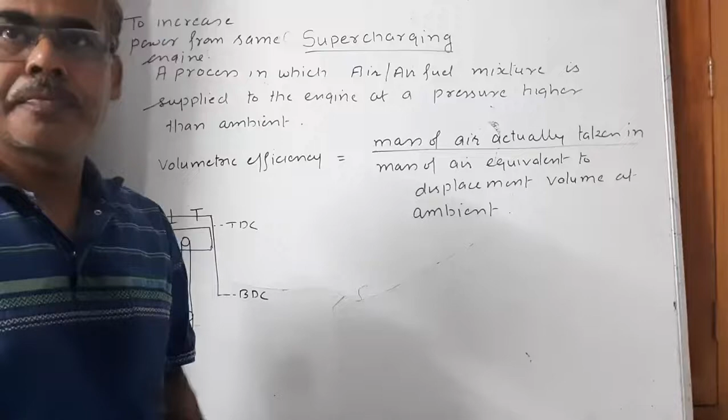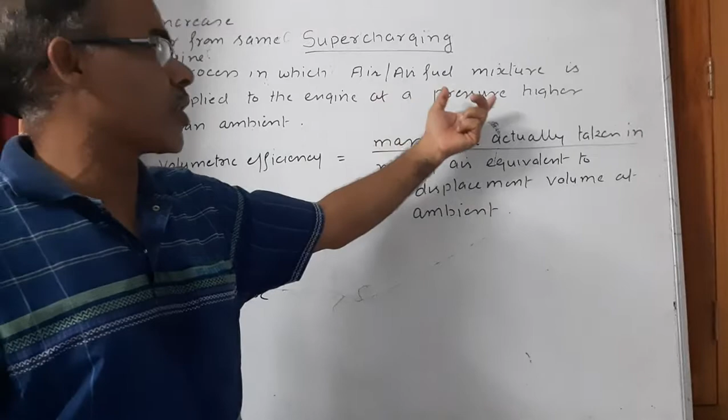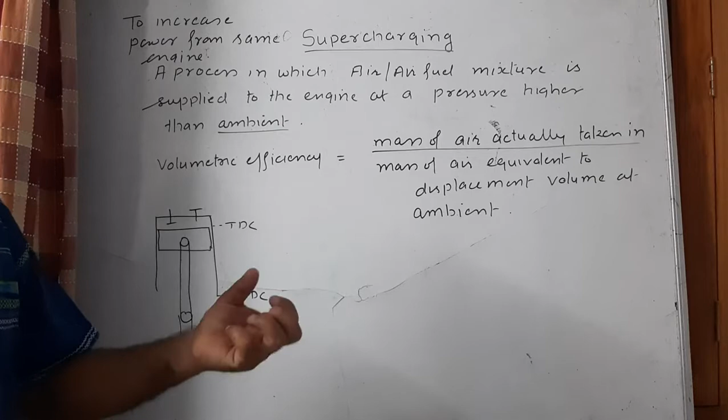So today's topic is supercharging. What is supercharging? Supercharging is a process in which air or the air fuel mixture is supplied to the engine at a pressure higher than ambient.

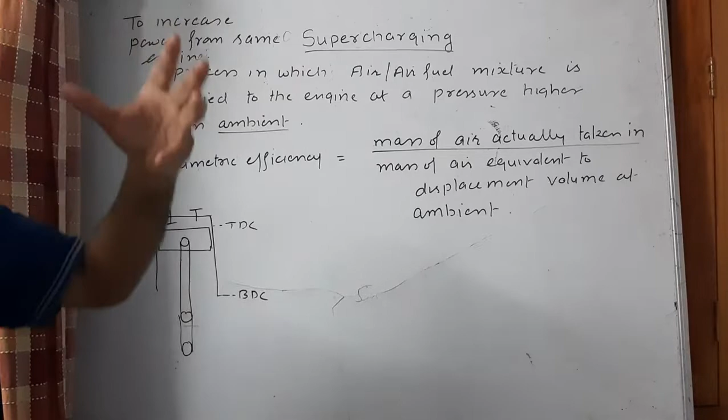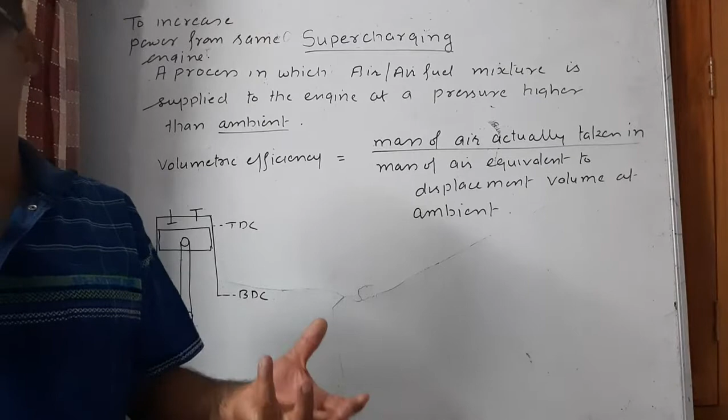What is the motive of supercharging an engine? The motive is to increase power from the same engine. If we can supply more air fuel mixture to the cylinder for the same volume, more energy can be supplied to it, and if the conversion efficiency is same, the power will increase.

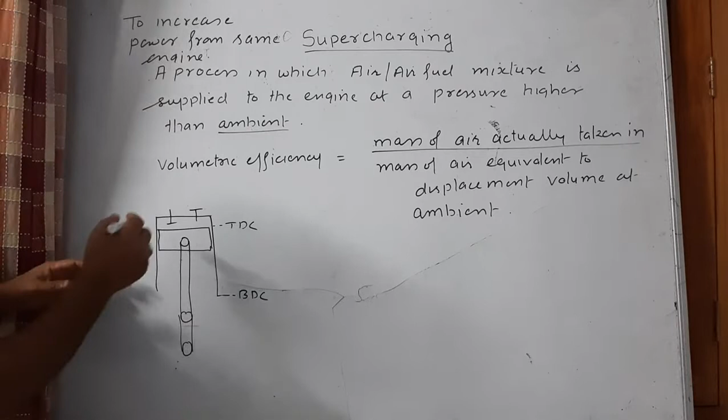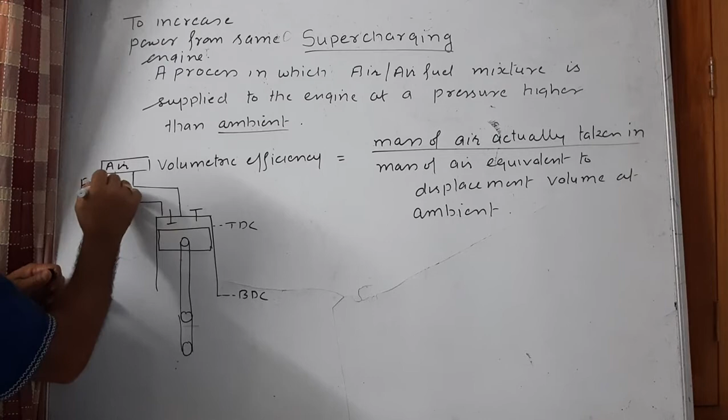Now what happens? I have drawn an engine. During the suction stroke, this is the inlet valve, this is the exhaust valve. On the inlet valve there is this air filter.

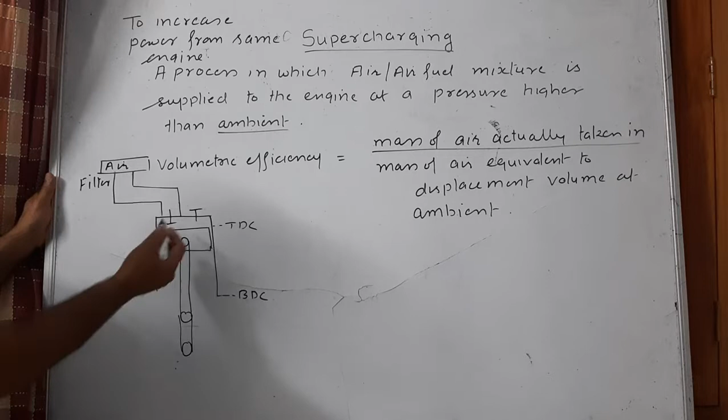When the suction stroke starts, atmospheric air enters the engine because of the pressure difference created due to increase in volume. When the piston moves down, the volume increases and hence the pressure decreases. So the air from atmosphere flows through the air filter, if it is a petrol engine, then carburetor, through the inlet valve, intake manifold, and then comes to the engine cylinder.

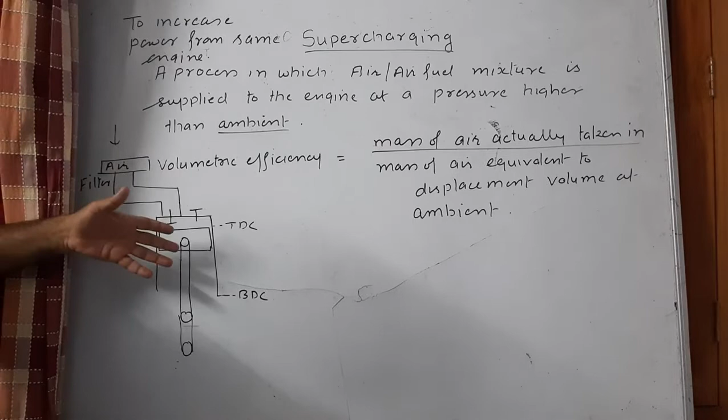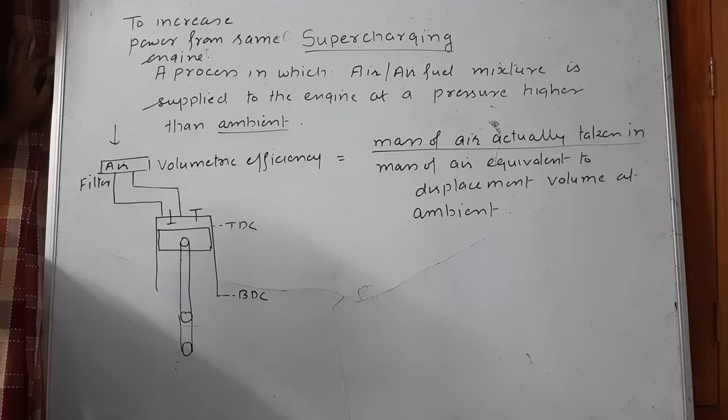So there are so many resistances, and there is a difference of pressure existing between the atmospheric pressure and engine pressure for the air to flow from atmosphere. Ideally, if we assume that as soon as the piston starts the downward stroke the air starts coming in, still the maximum quantity of air which can be inhaled by an engine is equal to the displacement volume, that is when the piston moves from top dead center to bottom dead center.

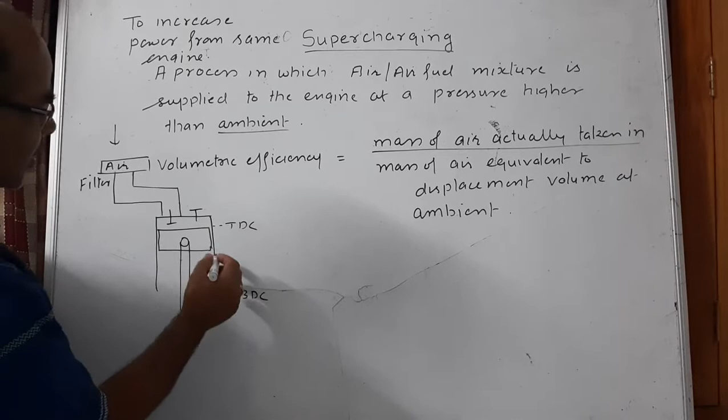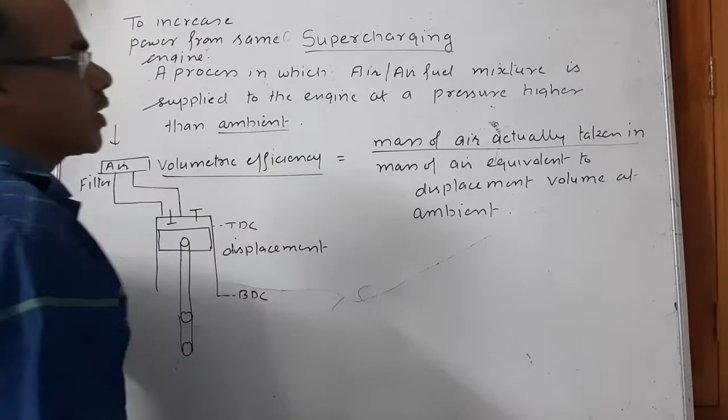So this volume is displacement volume. The quantity of air fuel mixture taken in determines the power output of the engine. This is how volumetric efficiency is defined: mass of air actually taken in divided by mass of air equivalent to the displacement volume at ambient, meaning atmospheric conditions.

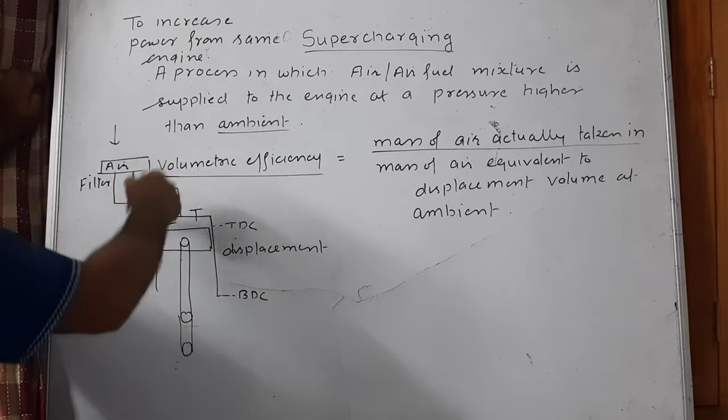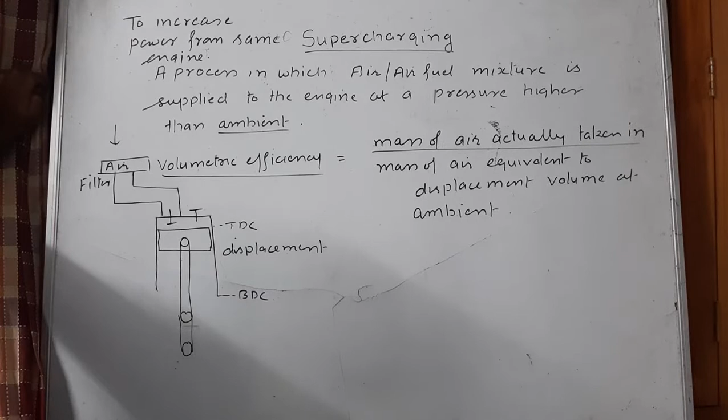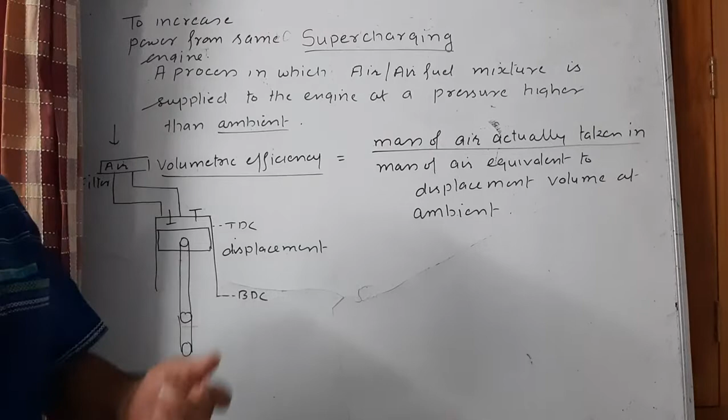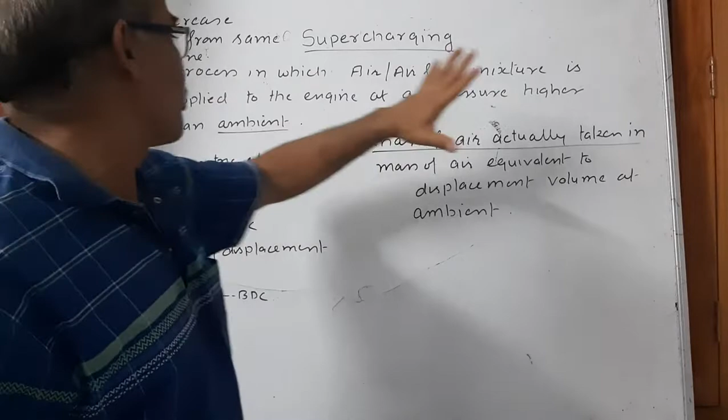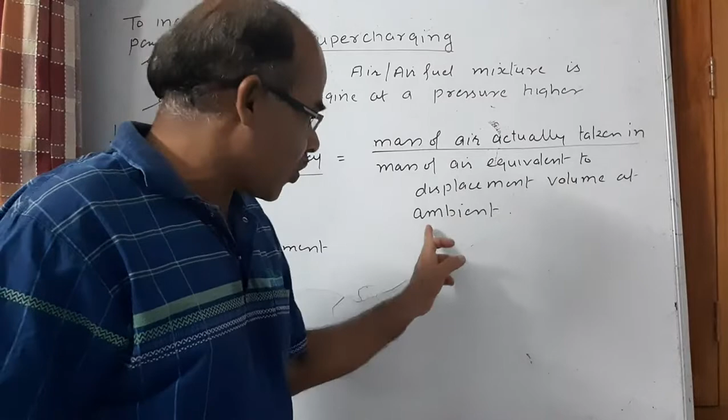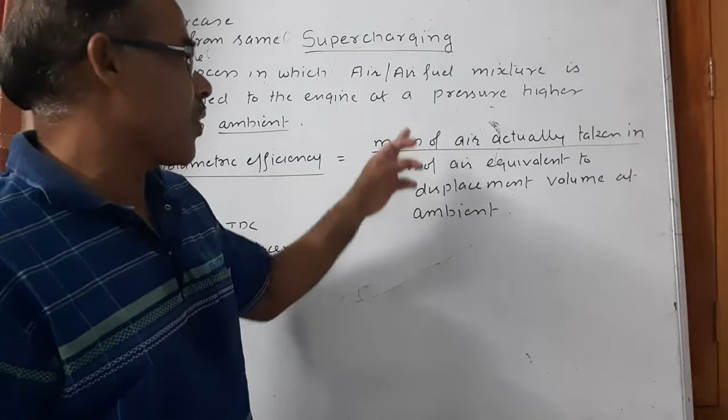So again, let me define: it is a process in which air fuel mixture is supplied to the engine at a pressure higher than ambient. In the definition, mass of air equivalent to displacement volume at ambient - if the intake air density is more than ambient, then this mass of air equivalent to displacement volume will be much greater, and the mass of air actually taken in will be much greater than the displacement volume when air is taken from ambient pressure.

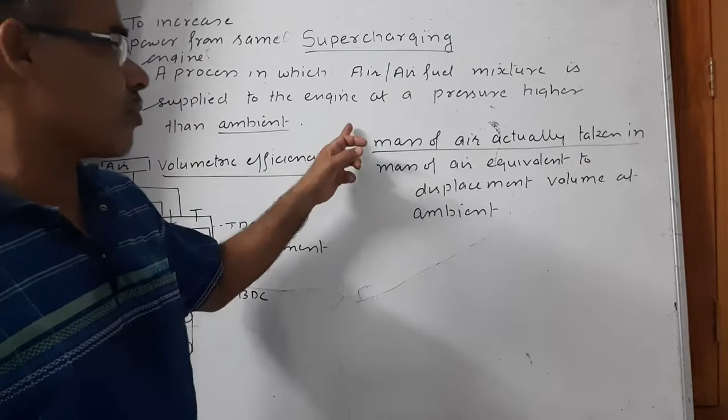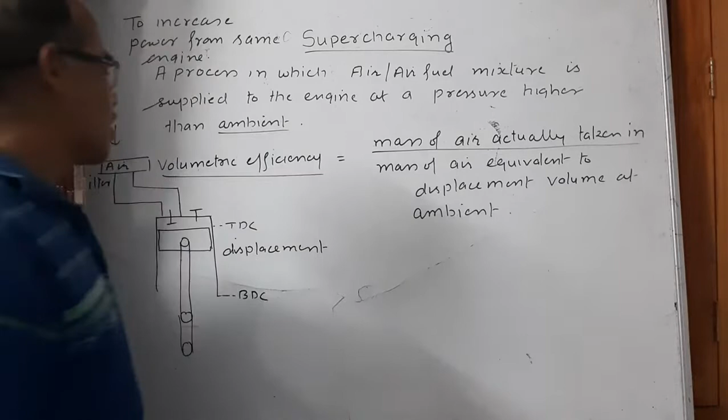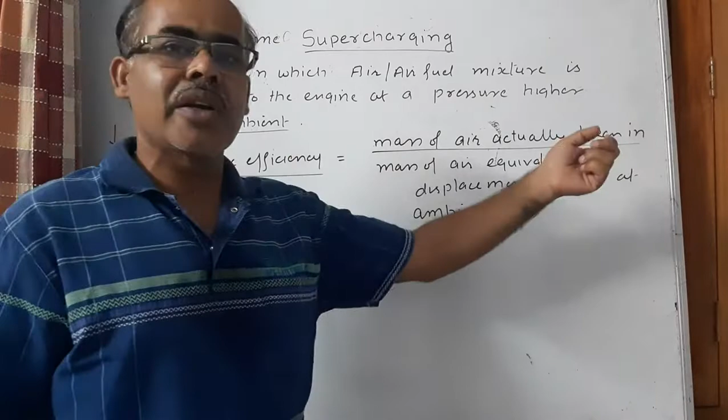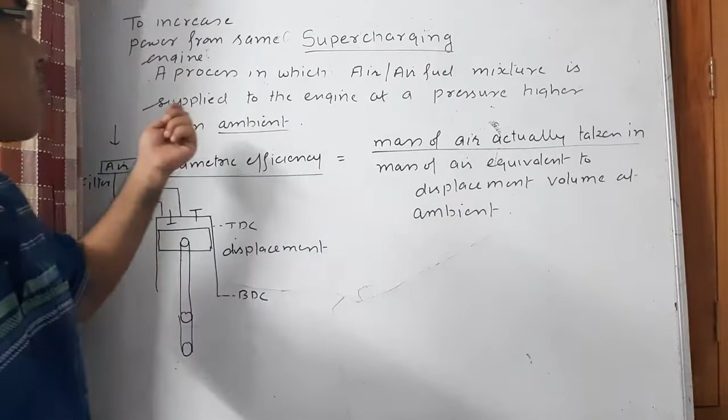If the mass of air actually taken in is at higher pressure, then this will be much more than the displacement volume, and hence for a supercharged engine the term volumetric efficiency is redundant. That is, volumetric efficiency cannot be defined because this ratio will be greater than 1 - mass of air actually taken in will be much greater than the mass of air equivalent to displacement volume at ambient. Hence volumetric efficiency is redundant for a supercharged engine; it is valid only for a naturally aspirated engine.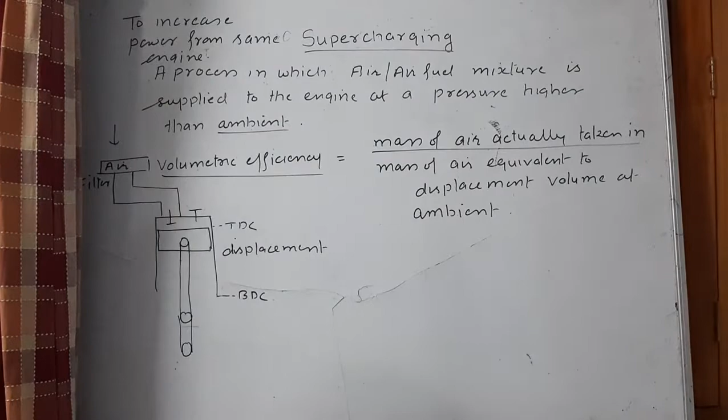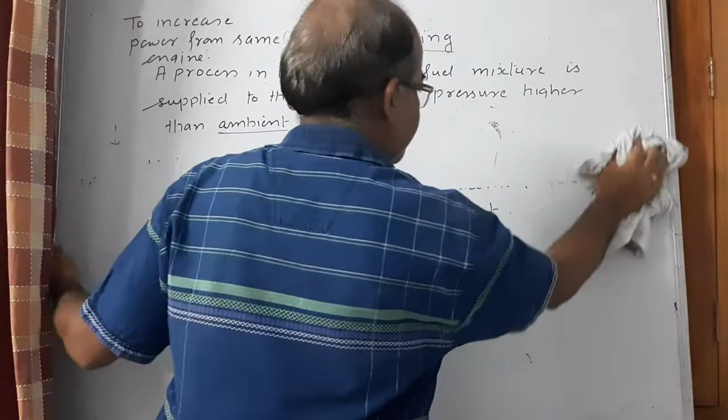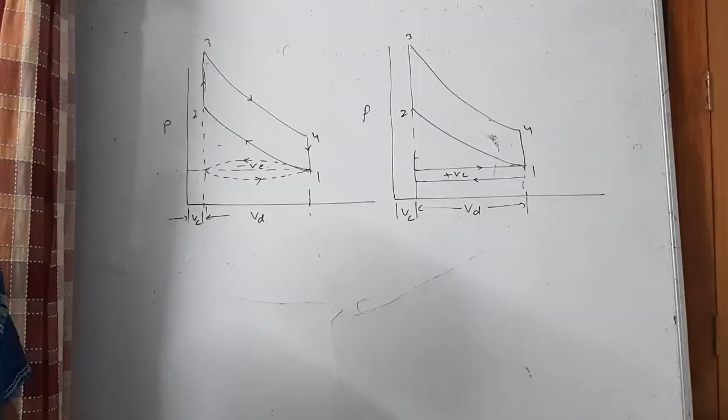So let us see how the PV diagram helps us understand the whole concept. Let us consider these two PV diagrams: this one is for a naturally aspirated engine, and this is for a supercharged engine.

Here, this loop is negative - this is for the exhaust stroke when exhaust gases are expelled from the engine cylinder, and this is during intake. The pressure during intake is lower than atmospheric or ambient pressure, so that air rushes in. So this loop is negative because work is required to force the exhaust gases out; this is the exhaust stroke, this is the mechanical cycle.

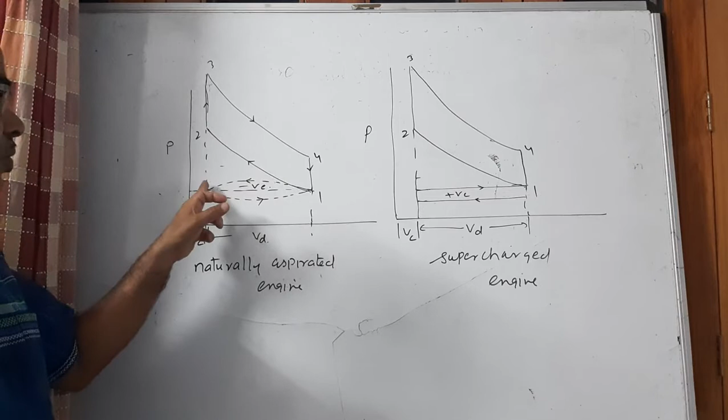So the work required to force the exhaust gases out - this curve is above the curve where the air fuel mixture is coming in due to pressure difference.

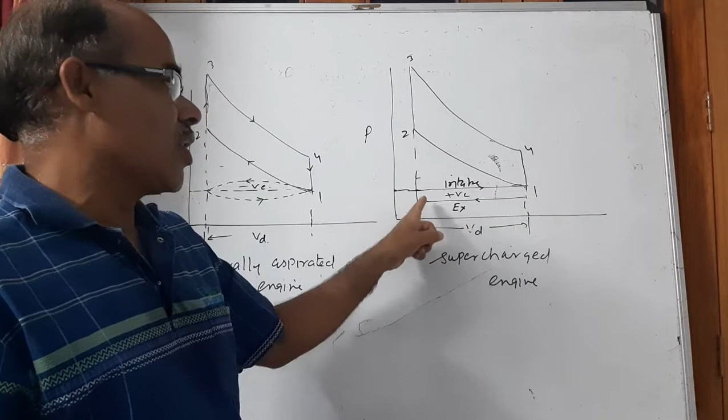But here, if you see, the air fuel mixture is supplied at a pressure. This is the exhaust pressure and this is the intake pressure. Here the intake pressure is higher than the exhaust pressure, so this loop is positive and hence it adds to the net work of the cycle.

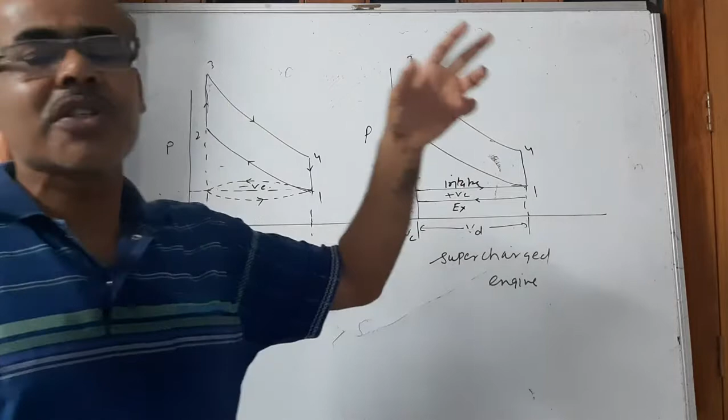Of course, some work is required to compress the air or air fuel mixture, and that would definitely be greater than before, but the difference will be less and will be compensated by the quantity of more fuel which can be added to the engine, and hence more power can be obtained.

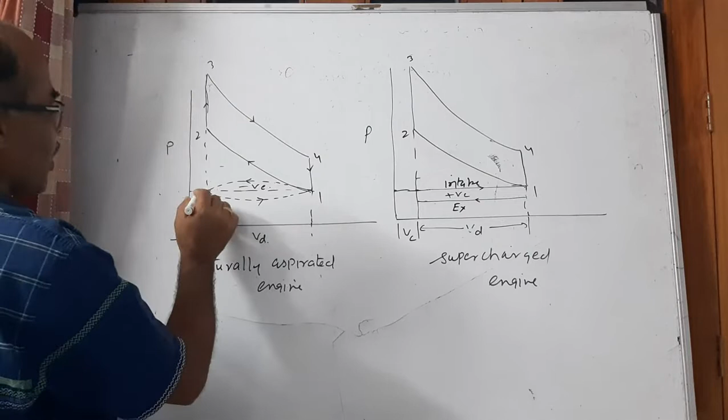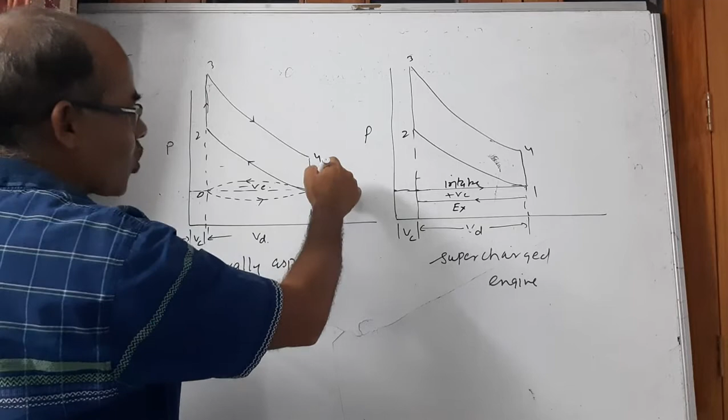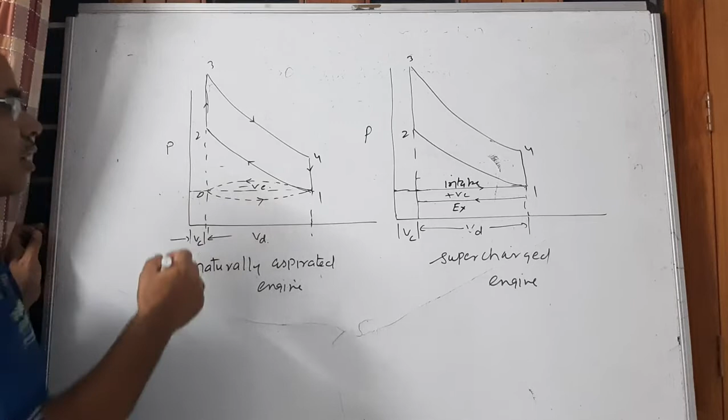So you just see points 1, 2, 3, 4: from 0 to 1 is the suction stroke where pressure is below atmospheric, then 1 to 2 is compression, 2 to 3 is heat addition, 3 to 4 is expansion, then 4 to 1 - suddenly due to opening of the exhaust valve the pressure drops, and this curve shows how exhaust gases are forced out of the engine.

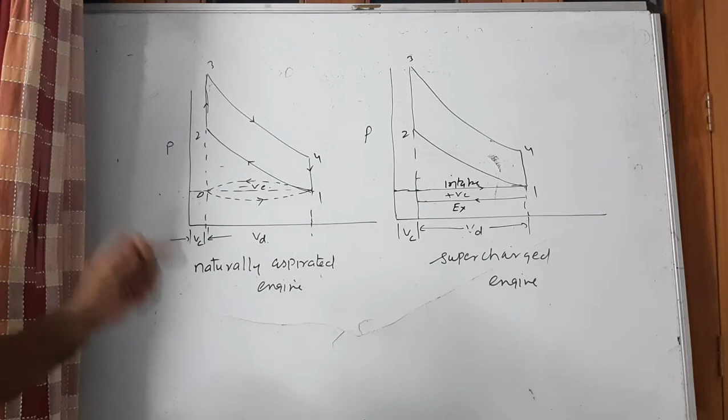So this curve is above the intake curve, so this loop is negative - the work done required to push the gases out is more than the work the intake air does on the piston during the suction stroke. But here the compressed air is supplied to the engine at a pressure higher than exhaust. So 0 to 1 is suction, 1 to 2 again compression, then 2 to 3 heat addition.

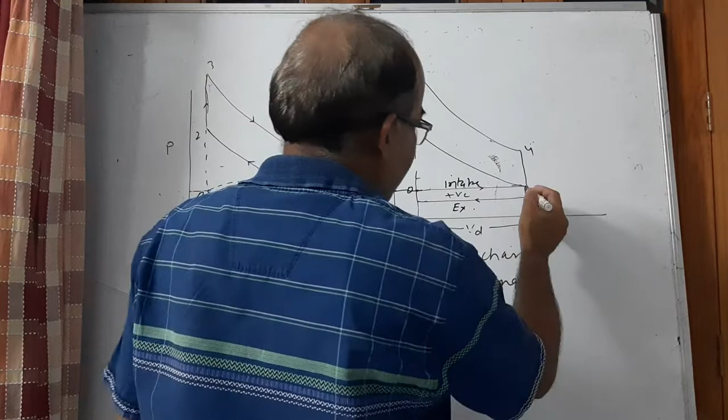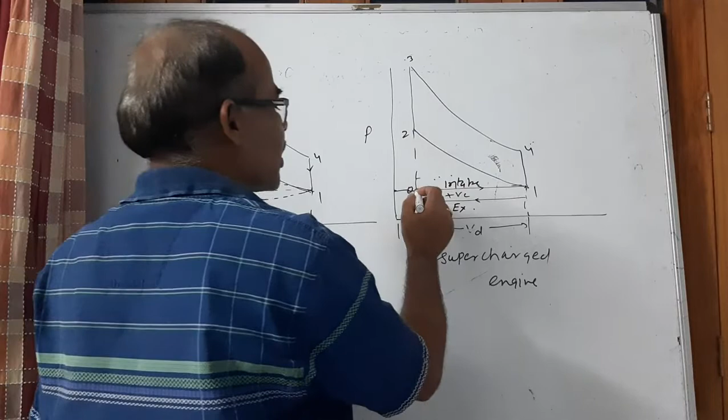3 to 4 is the expansion stroke, then 4 to 1 the exhaust valve opens again and gases rush out at a pressure - forced out at this pressure. So this loop is positive, meaning the air or air fuel mixture taken in at a pressure higher than the exhaust pressure makes this the positive loop.

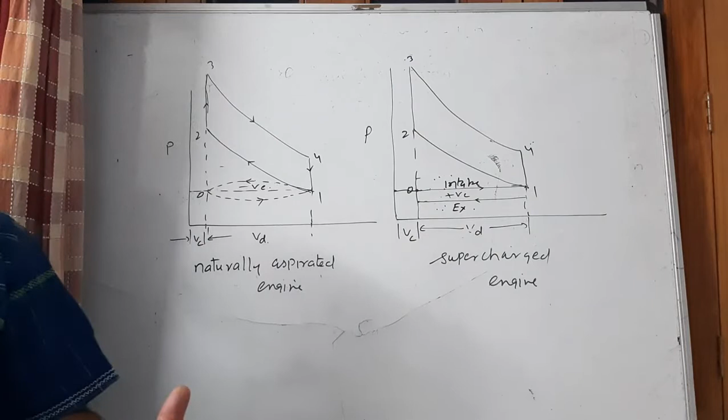One must understand that some work is required to compress the air before it is given to the engine cylinder, and that work is definitely more than before, but due to addition of more air in the engine, more fuel can be supplied to the engine, and hence work output can be increased.